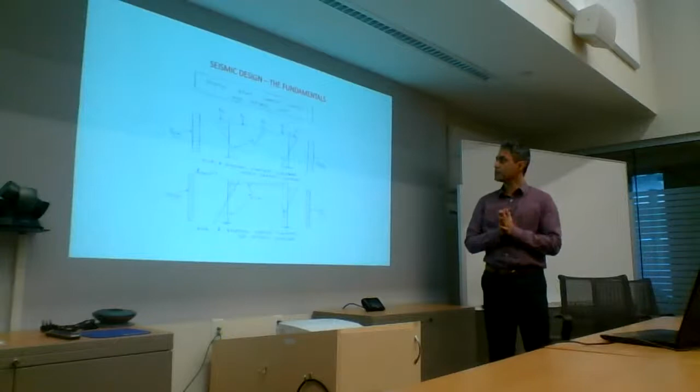This is just a little cartoon which shows us something kind of basic, but it's probably important to realize what's going on. So this is a typical bridge bent, and let's assume it's got 5 girders sitting on it. You can assume the girder takes a load from the tributary area of the deck, brings that load down, so it's got 5 discrete points - that's just your gravity loading sitting on this bent.

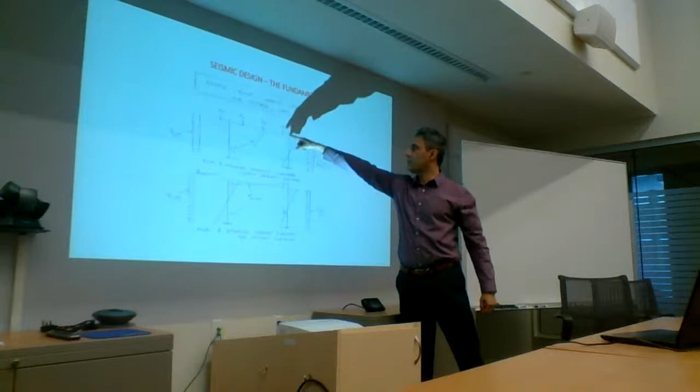If you look at this, you'll have negative bending over the columns in the cap, which goes into positive, reverses, and then these are the bending moment profiles in your columns. And you have some axial load - that's what it's doing.

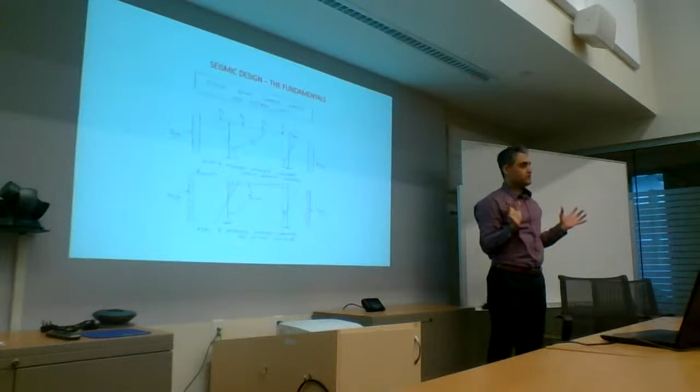Now an earthquake comes along, and let's just say that it's a bidirectional phenomenon, as we all know. It goes this way and that way. But just for simplicity, we can think of it as going this way.

So if I have an applied load or applied displacement this way, this is the bending moment profile or diagram for the cap beam. And below is shown what's happening to the column.

You can see that whereas over here I had negative bending over the column, now it's gone into positive bending. So this is reducing the effect of gravity on this side, while on this side there is negative and negative, so they'll add up. So on the leading side, your cap beam and column moments are increasing.

On the axial load side, this will generate some tension, and that will generate some compression. This compression and that compression will add up, and this compression and this tension are going to subtract. So this column gets lighter and that column gets heavier.

That's just, I'm big on load paths. You just need to understand in some very simple terms how things behave.

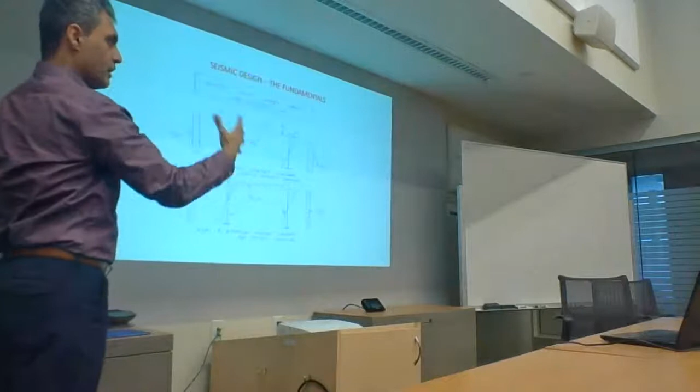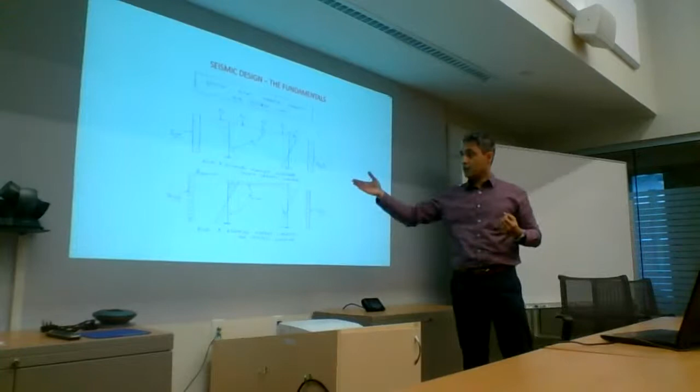So your gravity and earthquake are now combining in a certain fashion, where bending moments are decreasing and increasing, the axial loads and shears are decreasing and increasing. And I'll talk about how back in the day they used to miss a lot of this, and we got some bad designs. Nobody's fault, because we didn't understand the phenomenon back then. But now when we run into those old bridges, we have to go do retrofits on them.

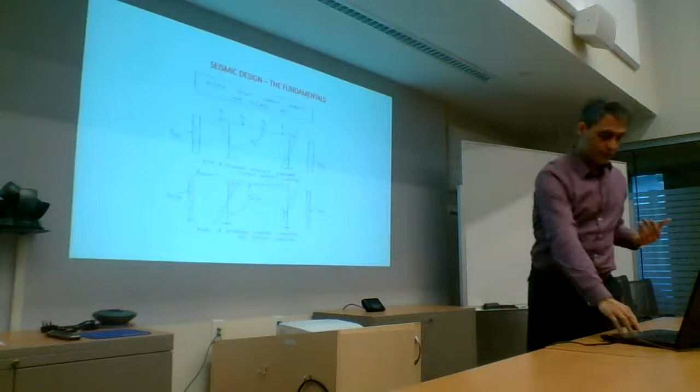So I want to bring your attention to a couple of important things. Gravity design is primarily strength-based. So you have your load and you have your capacity. And if your capacity is smaller than your demand, you're basically going to have a failure, and its effect is going to be catastrophic.

We've seen that in buildings where things get overloaded, they collapse. Bridges also have collapsed because the live load that's come onto them has been greater than the capacity. Unless there is some way to redistribute that load, it's quite difficult for the structure to sustain that.

Because gravity is always there, and it's unidirectional. It's acting downwards, it's always there. So now if you start to overstress something, it's not like gravity is cycling back and forth. So there is no relief to your system.

When we do gravity design, we don't really account for cyclical loading. There's no need to do that. You can do a little bit of load redistribution, you can rely on that, but it's not usually relied on.

We do our elastic analysis, we get our elastic demands, there is a disconnect there. Then we do our capacities, which are based on inelastic material properties. Could anyone tell me why that design works or how that design works?

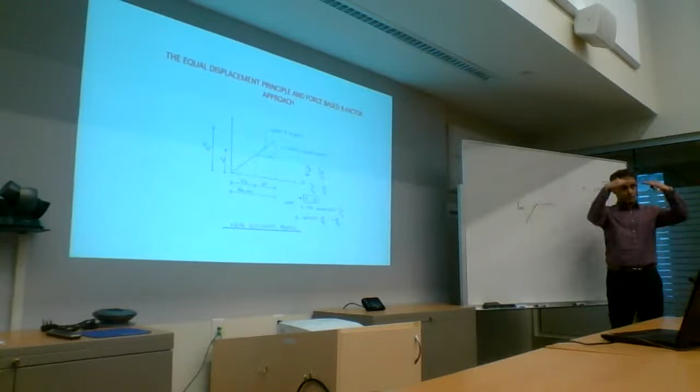So that's what happens if you take these similar triangles and their ratios. You basically come up with the elastic force over the elastic displacement divided by the Fy over delta Y. You basically find that R, the force reduction factor, is the ratio of this to this — that's the reduction in strength I'm going to incorporate in my structure. It ends up equal to delta U over delta Y, which is the ductility in the system.

So the penalty I pay is some damage in my system. Now, how do I control that? I have to make sure it has the ductility to reach the same displacement, but it's not reaching that displacement in an elastic manner. It's going along this plastic branch, which means it's getting some damage in it.

Based on this, they've studied different systems and said they have different inherent ductilities. A building with a shear wall has an R factor of however much. A single column in a bridge, you can use an R factor of 3. For multiple column bents in a bridge, you can use an R of 5. This is codified in our code right now.

So what you do is you run your elastic analysis. You don't change any of the stiffnesses, whatever stiffnesses are there. You run your analysis, whether it's single mode or multi-mode response spectrum analysis. Then you go in and divide your moments by a factor of 3 or 5 or 8, depending on whatever your system is, and you only impart that much capacity to your system.

You don't give it the elastic capacity. And then the code says, okay, now we know you've designed it in a way that your strength isn't matching the elastic demand, and your system is going to go along this line. Now you have to control the fact that it doesn't just blow up in your face right here. Everything just goes. So what do you have to do?

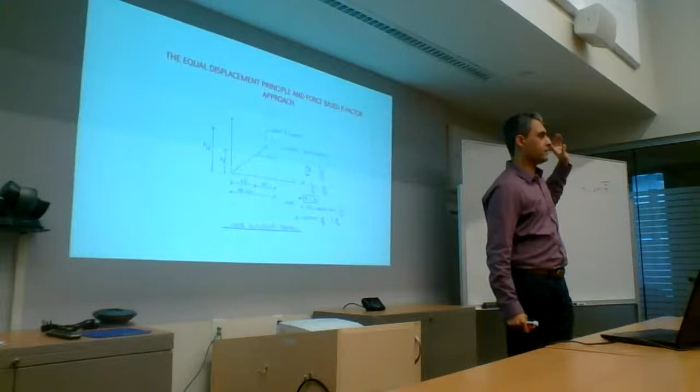Now here is the problem. First, the equal displacement principle only holds true in a loose sense, and it only holds true for longer period structures. So if your structure is 0.2 seconds, it's garbage. It's not going to hold. As soon as it goes ductile and yields, your R factor is going to go through the roof. They've done lots of studies showing you can be at around an R factor of 20. So if you've designed it for an R factor of 6, guess what? Not going to work.

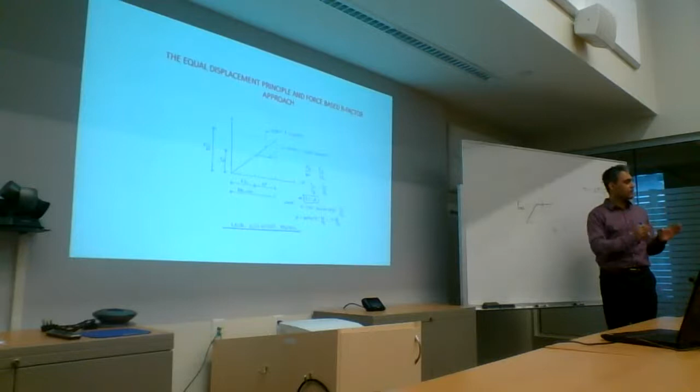The second thing is, you never go back and explicitly check that your structure is able to displace this far. You just have to close your eyes, rely on the code, and say, yeah, with this detailing, I will get this much ductility. Okay, and that can work in some situations.

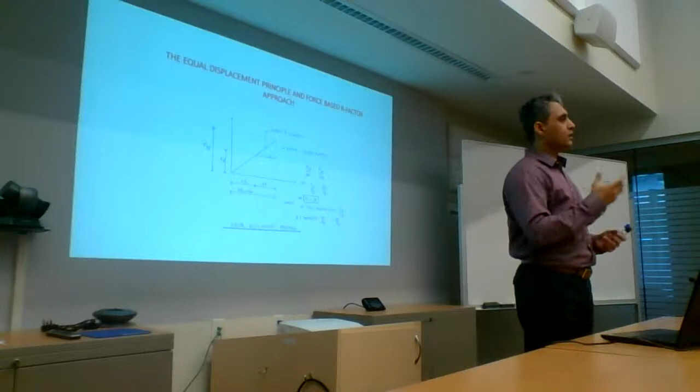Over the course of this talk, we'll talk about other situations where that's not going to work, and some other issues that are going to come up.

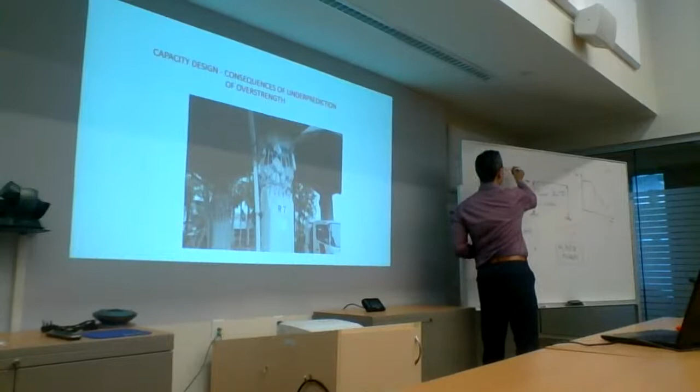And these are all elastic designs. So you make something this strong, the earthquake can actually push it here, and it fails right here because it has no way of traveling onto this plastic path.

Now, I want to talk a little bit about the principal shortcomings of the force-based approach. A lot of the times we don't realize that there is an interdependency of strength and stiffness. They are not divorced from each other. They're mutually dependent.

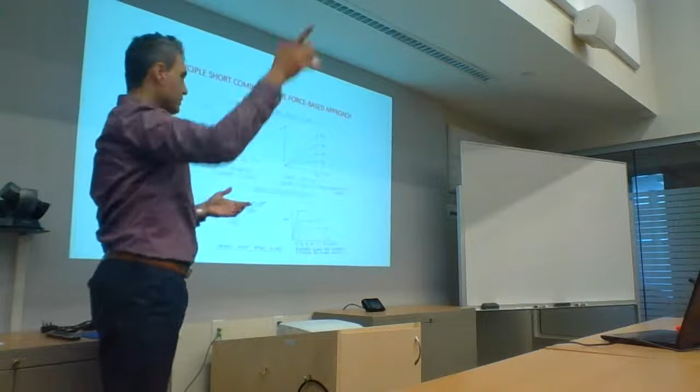I have a little cartoon that I've pulled out of Dr. Priestley's book. This is our usual assumption - that I have a system that has a strength M4. This is a moment curvature graph, so as I put more moment into a system, it undergoes more curvature. Here is where it yields, and then it goes plastic. Usually this is a bilinearization of it - really you have some sort of a post-elastic slope to things, but let's just stick with this.

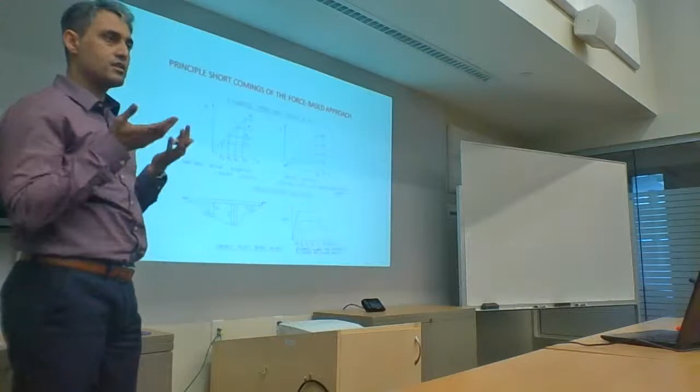Then I say, okay, I can make this thing stronger so that it doesn't yield at M4, it yields at M3. So I've bumped up my capacity. And then to M2 and M1. Now, my assumption basically is that the slope of this line does not change - I'm making something stronger, but I'm not changing its stiffness. That's an incorrect assumption. As you increase the strength of something, the stiffness automatically comes up.

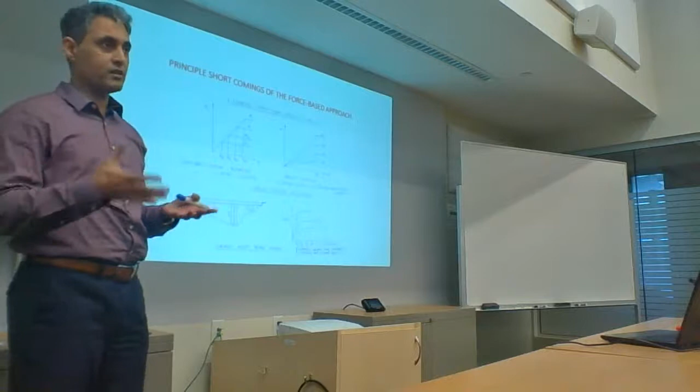So if I were to take a 914 column and strengthen it with a steel jacket around it for retrofit, and if I anchor that steel jacket into the footing, I've got a composite section, albeit about the same size. I've given it a lot more strength because now concrete and steel are working in unison with each other - it's a composite system. And now it goes from M4 to M1. The system is not this, the system is that. The M4 stiffness is this line, and the M1 stiffness is here.

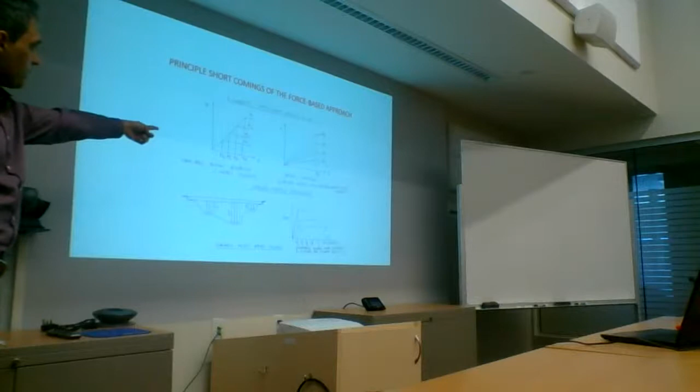It's usually the yield curvature that stays about the same - I've done lots of studies on those. It's the yield curvature that doesn't change. The strength and stiffness change, whereas with the force-based assumption, we have this other assumption. Why do I say that? Think about that for a second.

The other issue is - and I think if you take one thing away in terms of the shortcomings of the force-based approach, this shows it very clearly - you have a bridge with 3 columns, all different heights, and let's say they're all single column bents. I've tried to keep it very simple. If I were to design this per the code, I could make a simple line element model, run my response spectrum analysis, and get my demands.

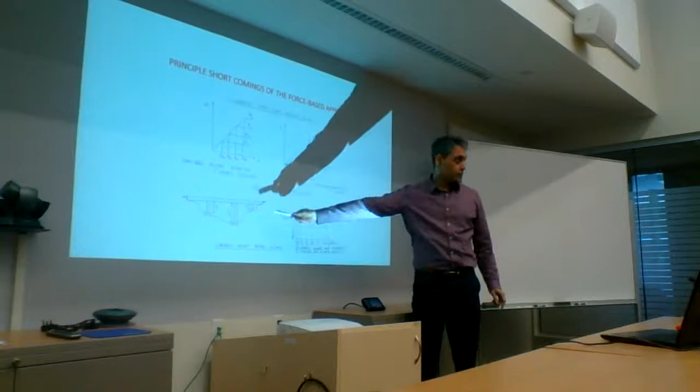The code says if your bents are unicolumn bents, single column bends, you use an R of 3. Okay, fair enough, let's go have a look. This column is shorter, it's going to be a lot more stiff. This column is going to be the most flexible, and that column is somewhere in between.

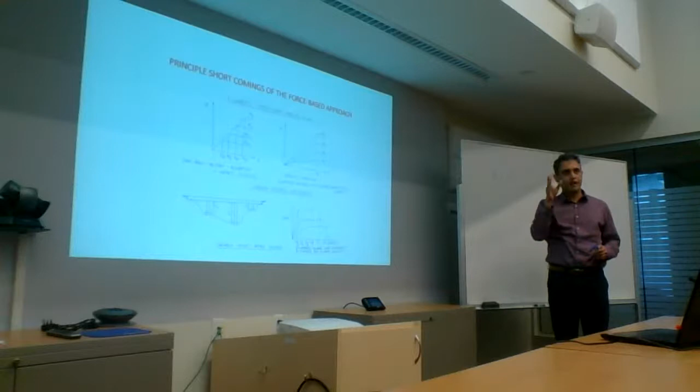So I get these different demands. I divide the demand in each one of them by a factor of 3, uniformly. That's what I do per the force-based design. This is their own behavior.

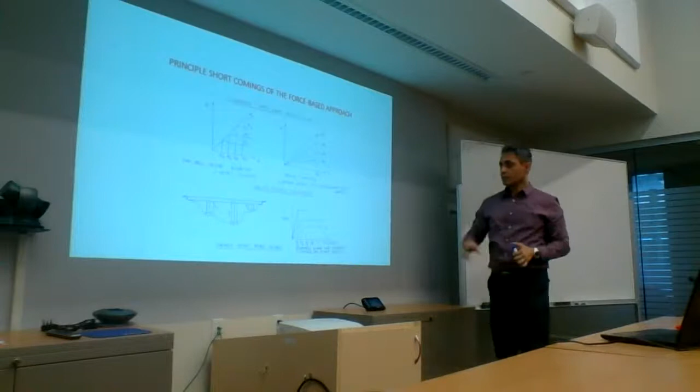So now assume that I'm applying an earthquake load on this thing longitudinally. Because my deck is a very rigid diaphragm, the tops of all these columns are going to see about the same displacement, because the deck doesn't compress by 10 inches or 250 mils. It might compress by 2 mils. So let's say that I'm moving this, say 40 mils under this scenario. Just think of the longitudinal push, we won't worry about the transverse for this illustration.

If I have a displacement on the system which is sitting here somewhere between C and A, well, guess what? C has already failed. A is way over here, B is over here. So let me draw this thing right here for a bit more clarity.

Let's say I have an earthquake that puts this much demand on it, in terms of displacement. That's why I keep saying we should think about earthquakes as displacements and not primarily forces, because that makes a big difference. So let's think of one earthquake that's sitting here. With me on this?

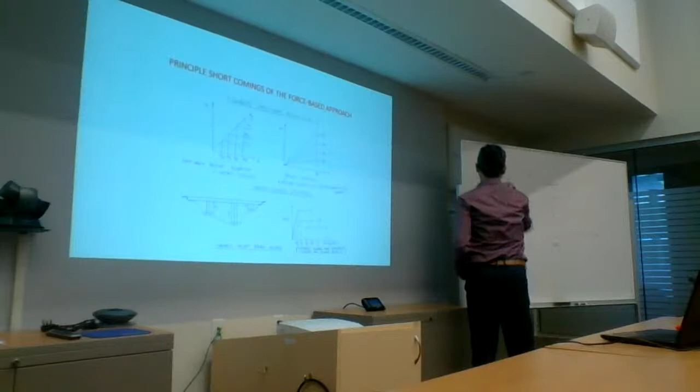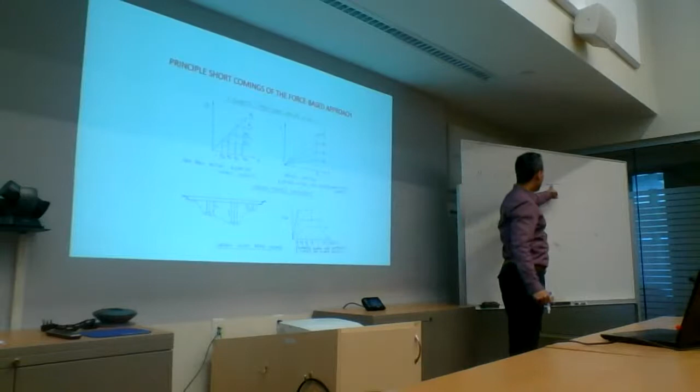This thing has yielded. This thing has yielded, but a lot less than this, and this thing is still elastic. What is R? It is a measure of ductility that your system or your column is seeing. Are the 3 columns seeing the same amount of ductility? One is seeing a lot more, one is just beyond this, and one is still elastic. So using an R of 3 means you're using the same amount of ductility for each column.

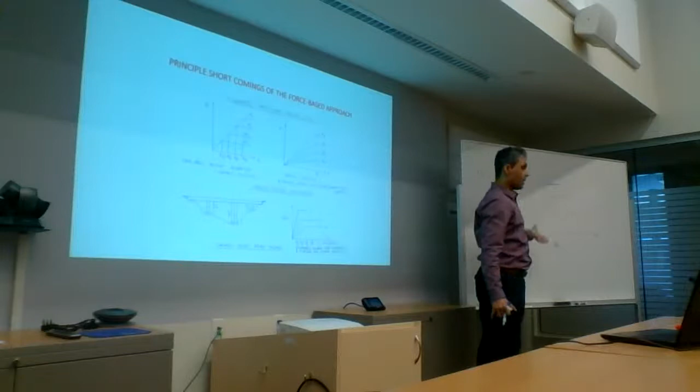Does that make sense? No. Yet if you were to follow the force-based design, this is exactly what you would do. So when you have large stiffness differences in your system, it really does not capture the behavior appropriately. Any questions on that? Kind of makes sense?

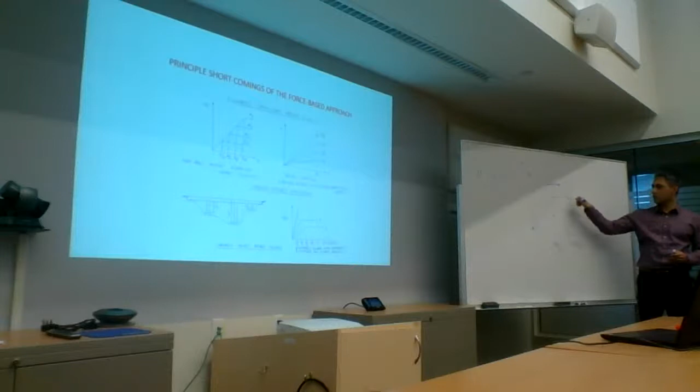Let's think of another system here. Well, this column is already done. These two are way down their plastic path. This R is lower than this R. Okay, had a question here?

So far, if you look at the codes till maybe even 2005, and in the building code right now, and you think back to what happened in Christchurch, our goal has been life safety. Let's keep our buildings standing. They may be completely beaten up, let's have them standing there, let's be able to evacuate people out. Well, the public's perception is very different.

And the insurance industry works in mysterious ways. So when Christchurch happened and all these buildings that, according to the engineers, performed beautifully - you know, they're leaning 2 degrees or whatever, but hey, we designed them to stay standing - and that was it, they fulfilled their purpose. The design parameters, the design performance was achieved, no doubt about it. But now you're left with something that you have to tear down.

And nobody could tell beforehand if this building was going to have repairable damage, or it was going to have some minimal damage, or it was going to be right at collapse, or somewhere in between. We as engineers cannot explicitly come up with the performance of a structure if we use force-based design, because we never go back and check where each column and the system as a whole actually lies. It just doesn't work. That framework is simply not there.

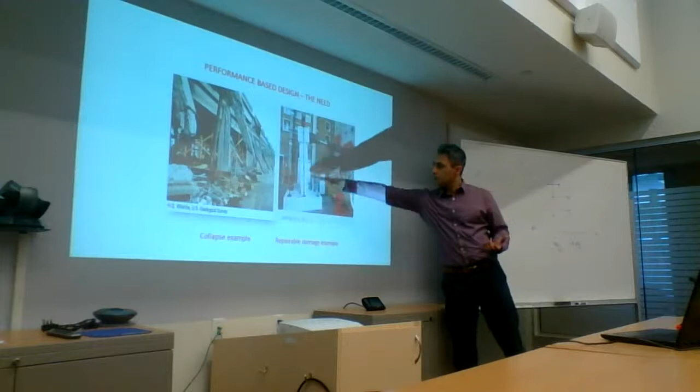This is an example of repairable damage. This is well detailed, based on Goodnight and others' columns that they've tested in 2012. Good spread of plasticity - you've got cracking that's well spread out, and you can go inject and do a little bit of other stuff to make it look okay.

So what are the allowable design approaches in our code? We're basically allowed both force-based design and performance-based design. The performance-based design is now the de facto methodology. For any complexity, any seismicity, any kind of structure, you can use performance-based design.

The force-based design we can only use under certain restricted circumstances. The example I was showing you before, where you have large stiffness differences, the code stops you from using it, because it realizes that this R-factor approach of applying a uniform single R-factor to everything just doesn't get you there. You get demand concentrations in shorter columns, they destroy themselves, and your structure is rendered either at the verge of collapse, or will collapse, or it'll have a lot more damage in certain parts that can't be repaired.

In our bridge code, we have three bridge categories. We have the lifeline bridges - think of the Port Mann Bridge, the Granville Street Bridge, the big bridges in the Metro Vancouver area that if something were to happen, you'd have a lot of economic consequences. Then we have the major route bridges - something on Highway 1, something on Highway 97 coming into Kelowna, the underpasses, overpasses. And if you were to go out into the country, smaller bridges that aren't economically that important, the code would call them other.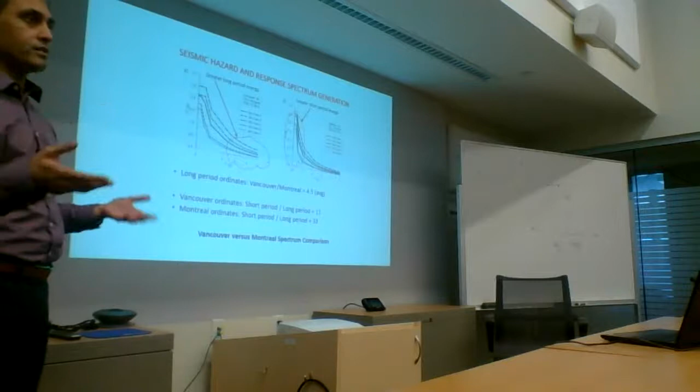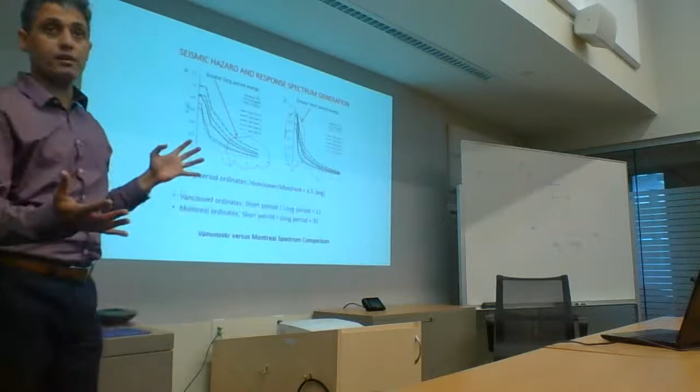You can also see here, on average, our long period ordinates in Vancouver versus Montreal are about 4.5 times higher. If you look at the Vancouver ordinates themselves, the short to long period ratio is about 11, whereas in Montreal it's about 33, which clearly shows there's a lot more short period energy in Montreal, and then it drops off pretty quickly.

So if you're designing in Eastern Canada in that pocket, be wary if your structure has a really short period. I'm not saying that when it's a long period structure you just throw it out, you do your checks, but you'll most probably find that it doesn't govern.

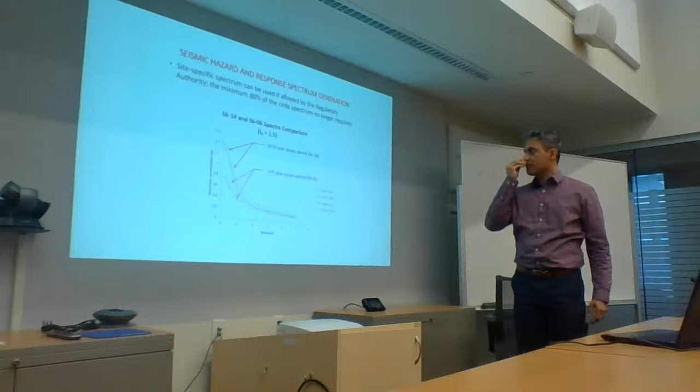Okay, this is just giving you a snapshot of how things have changed from S6-06 to S6-14. In S6-06, our basic period was 475-year return. Now we are dealing with 2475.

And in this code now for the force-based design, we only look at 2475-year return period. We don't look at the other 2. We look at all 3 for performance-based, but we only look at 2475 for force-based, and that's what you apply the R factors to.

There is still an importance factor in the force-based design, so it bumps up the values for your spectrum by a factor of 1.5. So for other bridges, you have a factor of 1, using your baseline response spectrum. For major road bridges, if you're doing force-based design, you have to increase it by 50%. Still use the same R.

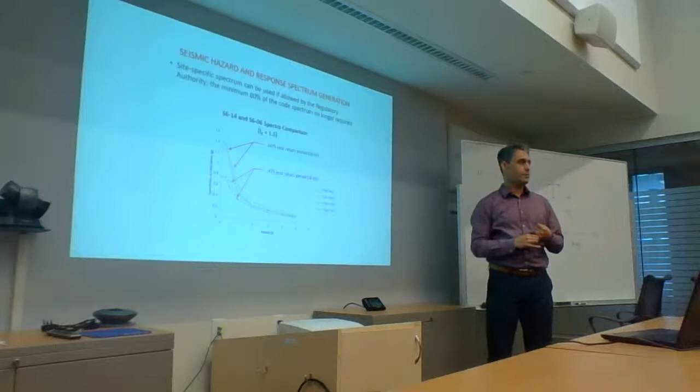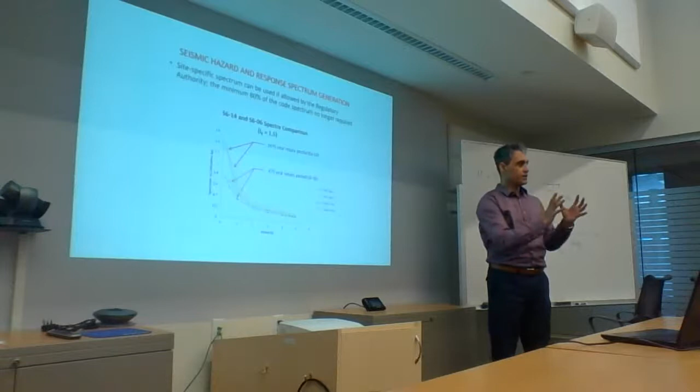For lifeline bridges, force-based design is not allowed. You have to do performance-based design. And when you're doing performance-based design, because we're looking at 3 different levels, there is no concept of an importance factor, because you're already looking at 3 different distinct seismicities. So keep that in mind.

We also have to look at some vertical effects in the code, especially if you're in close proximity of active faults, where you get near fault effects within 10 kilometers.

So the vertical spectrum can be generated - usually here in British Columbia, we're a bit spoiled. We always get a geotechnical engineer, which to me is the right thing to do, not make the structurals make wrong decisions for coming up with this sort of stuff. So you can do site-specific analysis.

Now, when you do site-specific analysis and you come up with your vertical spectrum, it cannot be lower than half of your horizontal values. And if you don't have that, you can just use 2/3 of your horizontal spectrum as your vertical spectrum if you have no site-specific conditions.

This I've already described. So these are some of the code R values. So wall type piers, you're looking at 2.

Single columns, you're looking at 4. For multi-column bends, you're looking at 5. You can also think of a bent which has 2 columns versus a bent which has 7 columns.

I don't know how much using the same R value makes sense, because one system has less redundancy, the other system has a lot more redundancy. A lot more plastic hinges can be formed. A lot more load redistribution can happen. Force-based design tends to miss those finer points.

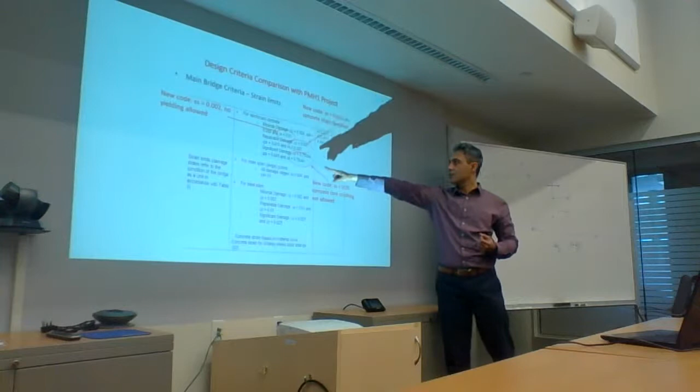For the significant damage, you're sitting at - concrete crushing is not allowed, which means you could take it to 100%. Now that's been scaled back to what this is: a steel rebar strain of 0.05. Here it was 75% of the ultimate.

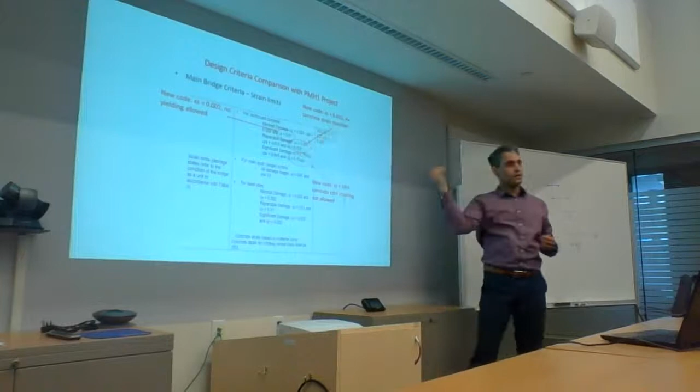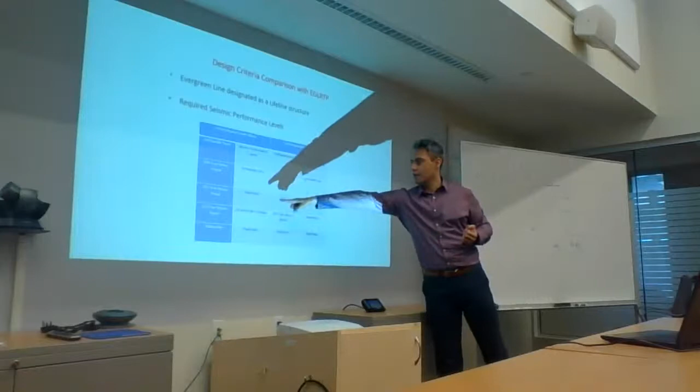So here, 475 was repairable for the areas where there was no liquefaction, but we had repairable for liquefaction areas under 975. 100 years was immediate use, so the code now is using 475 for immediate use.

Was that okay with that criteria? The ministry for the Evergreen Line - yeah, it was a ministry criteria, which again we had to talk to them about quite a bit, but it was really through the material strains.

What was really hurting us was the 0.002 strain limits and all of those that we couldn't design with. Once we got that to a reasonable point, it became a lot easier.

And then for liquefaction, we got permission to allow some plastic hinging within the ground on our piles, because we just could not design them when the soil was moving so much.

Okay, so I'm setting the stage. Don't get lost. This will all come together because I'm giving you the high level, and then we'll go into the nuts and bolts of everything.

Now, how do we show performance compliance? Basically, in our code, it's through material strains. You'll see some documents where you're looking at plastic rotations, or other things, but in our code it's primarily strain-based, material strain-based. So you're going all the way down, below plastic rotations. You're not saying, oh, my plastic rotation is 0.01 radians, and therefore I've met the target.

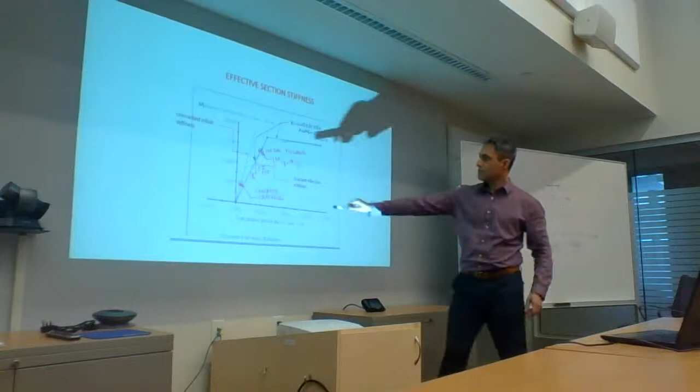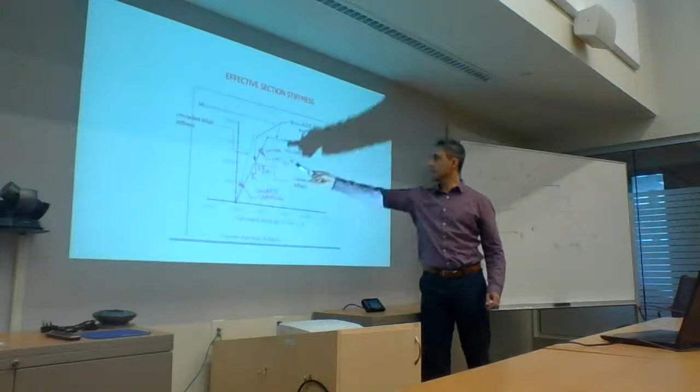Now how do we do that? If you run your moment curvature analysis, you can see this is where you're cracking. And if you were to go along that first line, you would go through here, that green line, which is not correct. So you go through this initial yielding, and you calculate the slope of this line to account for the fact that when you're looking at the effective stiffness of concrete, it's going to be much smaller.

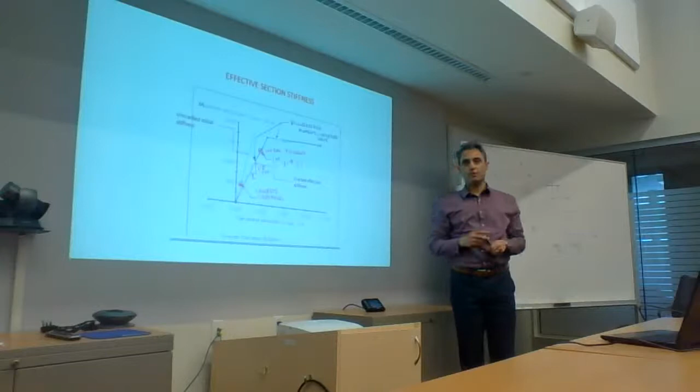The other thing that happens is when you're using soil springs for your soil structure interaction, your soil springs are also nonlinear. So they stay linear to a certain point, and then they go nonlinear.

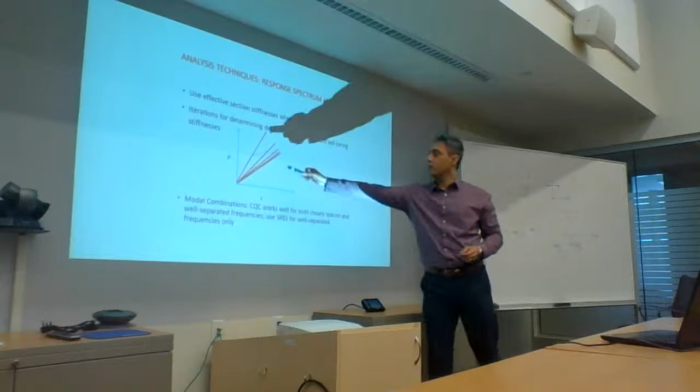So what you have to do is, when you're using your response spectrum analysis, you cannot use the initial stiffness. You have to use one stiffness, go back, look at it, and see if the force is up here, you know that stiffness is wrong. So you come back and you recorrect until you converge. So it becomes a little bit tedious. But in response spectrum analysis, you have to get that secant stiffness.

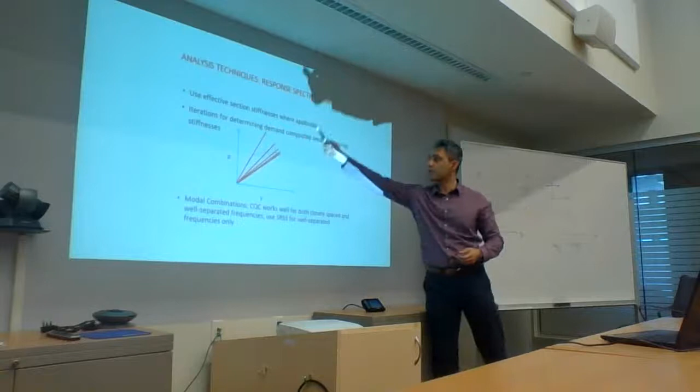So think about two things. One is the effective stiffness of concrete, and when you have the soil springs, you have to figure that out, because the program on its own can't. It's a linear analysis, so you only are allowed to put in one stiffness. And so you go and you look at the spring displacement and force, and if you find that it's off the chart, off the graph, then you have to correct it, so you keep correcting it till you find that converged secant stiffness, and then you come up with your lower displacements out of that model.

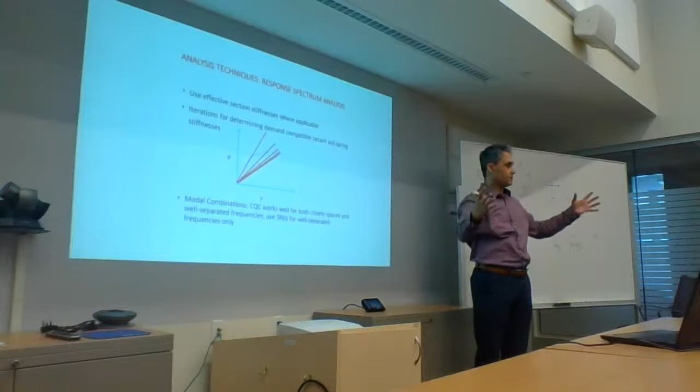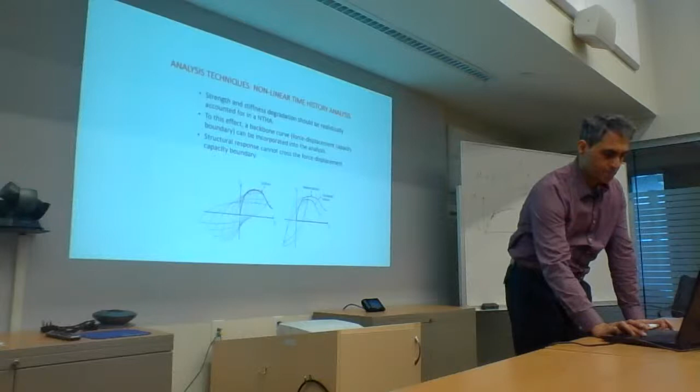We'll talk more about these things. We'll talk about combinations afterwards. Pushover analysis we'll talk about. I'll show you certain things. Of course, nonlinear time history analysis. How do you match? How does damping work? All of that. All of this is coming up, so I'm just skipping through here. I understand this is an hour and 45 minutes.

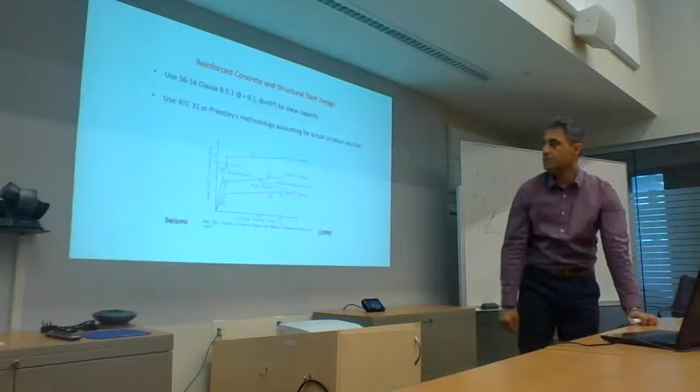As you develop a plastic hinge and you cycle it back and forth, the concrete aggregate interlock starts to degrade. The concrete shear capacity, within a reinforced concrete section, your shear capacity comes out of two things: one is the concrete, V sub C, and one is steel, V sub S. V sub S doesn't degrade unless you haven't properly detailed your hooks into the core or your spiral isn't continuous and properly wound. If that happens, and the cover falls off, it opens up, now all your steel is gone. But let's assume that you detailed it properly.

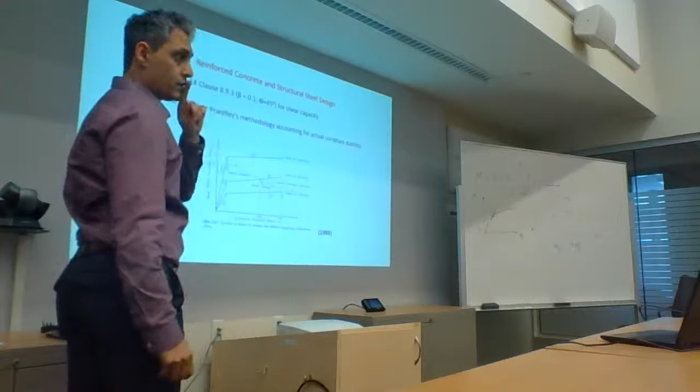There is still a problem. The problem is that as you form a plastic hinge and you cycle it back and forth, you are going to have mechanisms kicking in where the concrete aggregate bond starts to get lost. So your V sub C starts to come down. This is a figure from Dr. Priestley's book, and it shows the issue. It kind of goes back to what I was talking about in terms of having a system that's too stiff and too strong.

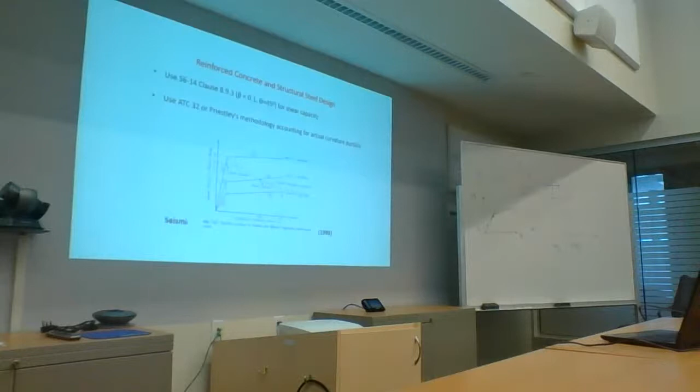So let's say you have a system that's really strong, and that's system number 1. It can go up that line. Here is my shear capacity envelope, this dashed line. So you see what's happening. Up to a curvature of about 3, this line is straight, which means there is no degradation. Your shear capacity is all of it. When you go beyond that, it starts to drop, it starts to come down, and then it levels off at some point, so it's fully degraded in terms of the concrete shear capacity. Now think of this system number 1. It wants to go up to here, up to V1, and go there. Well, what's going to happen?

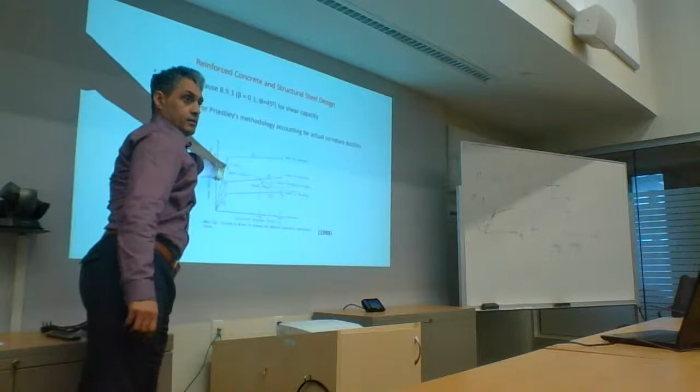When the base shear hits this point, the system is going to fail because it doesn't have the shear capacity relative to the peak force it can attain. So if you made it so strong that it can generate a lot of bending moment, which is accompanied by a higher shear force, it's not helping you.

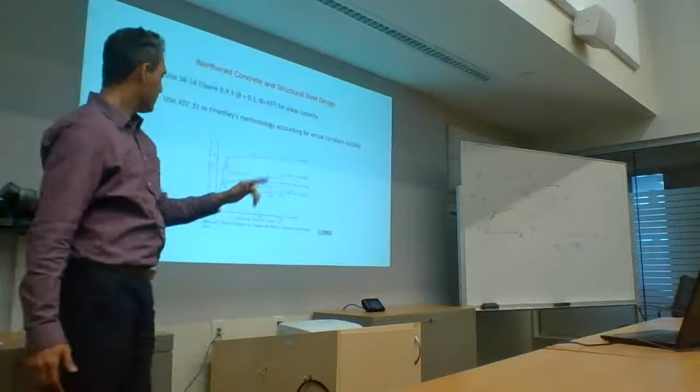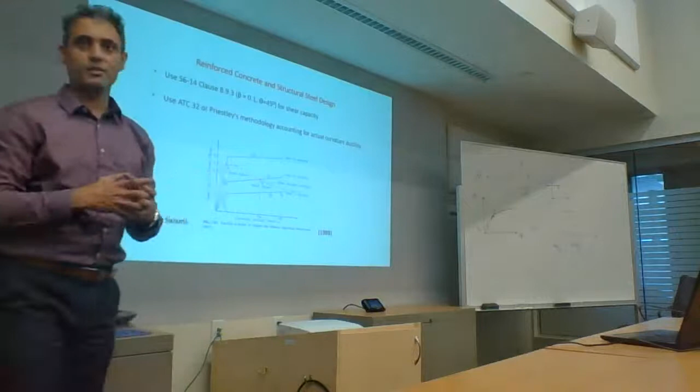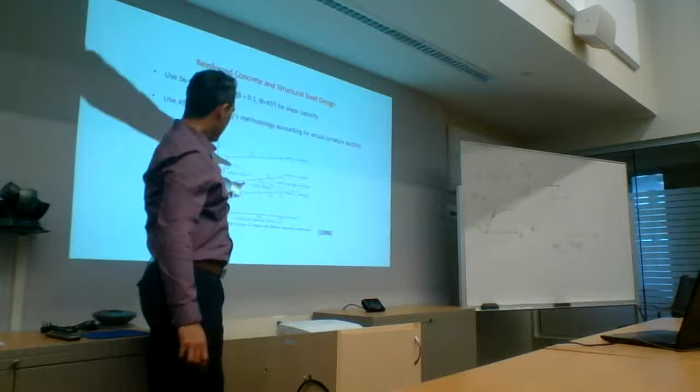System number 2, on the other hand, yields here, but then it's got some post-elastic stiffness. Now it starts to keep climbing up, but it's generating a lot of ductility now, which means what's happening in your plastic hinges? They are degrading, so the shear capacity envelope is coming down. In theory this system can go all the way up there, but it clips the shear envelope right there. So for this system, you're going to have a shear failure at this point.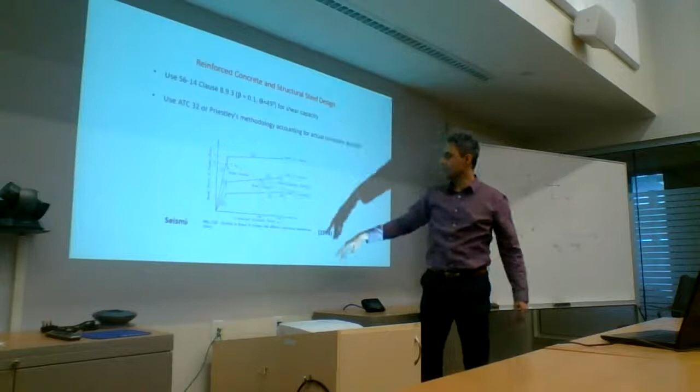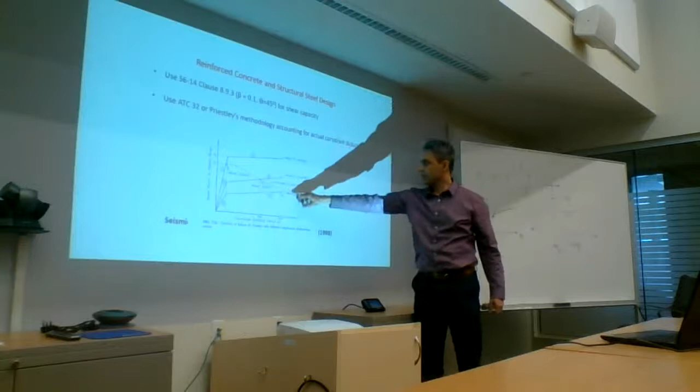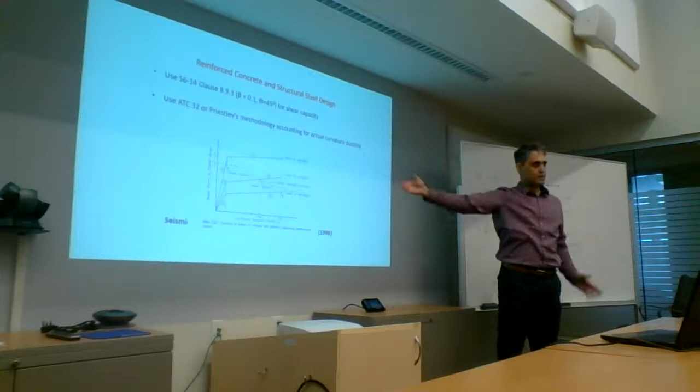The third one is a system which is nice, it's ductile, it's not that strong. Its flexural ductility is all the way out to here, about the same as these guys, but it never is going to clip that envelope. So which system do you think we should design for? Number 3, it gives you all the ductility. This ductility means it's giving you the same amount of displacement, but it's not going to run into shear issues. And when that happens, especially on shorter columns, you run into problems.

Okay, so let's just quickly talk about a couple of takeaways and wrap it up. Several changes were brought into S6. This is a major rewrite, the whole chapter basically got rewritten.

In S6-19, we have a few more changes, things we've learned over the last 5 years, from 2014 to now. Of course, FBD and PBD are both incorporated. PBD can be used for any bridge. FBD is subject to previous preconditions, right? So for any lifeline bridge, no. For major route and other structures, yes, as long as they're somewhat regular.